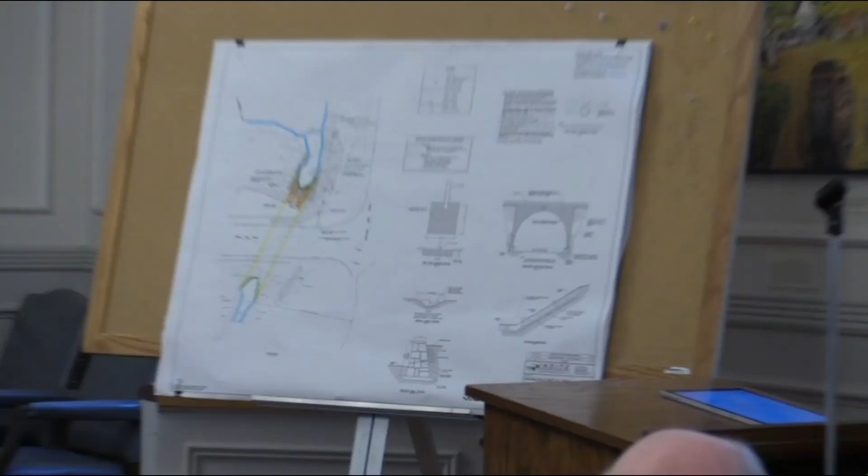Now, instead of just restoring things to the way they were so that things can erode again, we're going to put a diversion swale along the curb line that brings the water away from the inlet of the culvert and discharges it further uphill into the stream after we create a small stilling basin. This swale is going to provide some filtering of runoff as well as the stilling basin that doesn't currently exist today. Right now, the water comes straight into the stream and is eroding the soil, which is a problem. So we feel there'll be a little bit of a benefit from that.

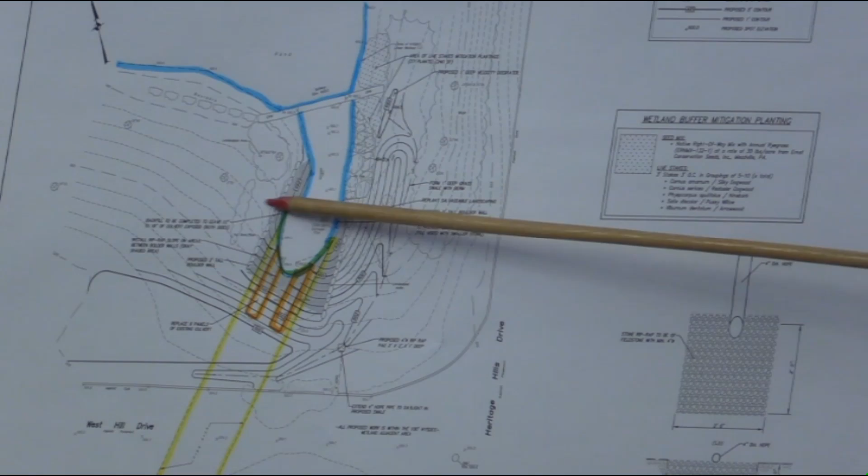In addition, we are going to better armor the side slopes with riprap to prevent further erosion. Water doesn't like to turn, it likes to flow in a straight line. Unfortunately, the angle at which the water leaves the pond is not in a straight line with the culvert. You have a dog leg. So we're going to reinforce the sides with riprap as part of this work to prevent the embankments from eroding out in the future.

We've received the latest memo from Woodard and Curran. We believe the comments that are left are very technical in nature and that we can address. We don't think they'll result in a major change or substantial changes to the plan. Our goal tonight is, if everything goes well with the public hearing, to ask you to close the public hearing, and hopefully we would then ask for the resolution to be authorized for chairman's signature so that we don't have to come back for another meeting.

Do you want to make any comments? So, we issued a memorandum for the last meeting. They addressed the vast majority of those comments. There's a couple of lingering items that we just need to close the loop on, and we added to our memorandum, as I mentioned at the meeting last time, some more detailed comments about the bypass, just to make sure that we're fully understanding. We've listed those in the memorandum. I went through them briefly with Rich.

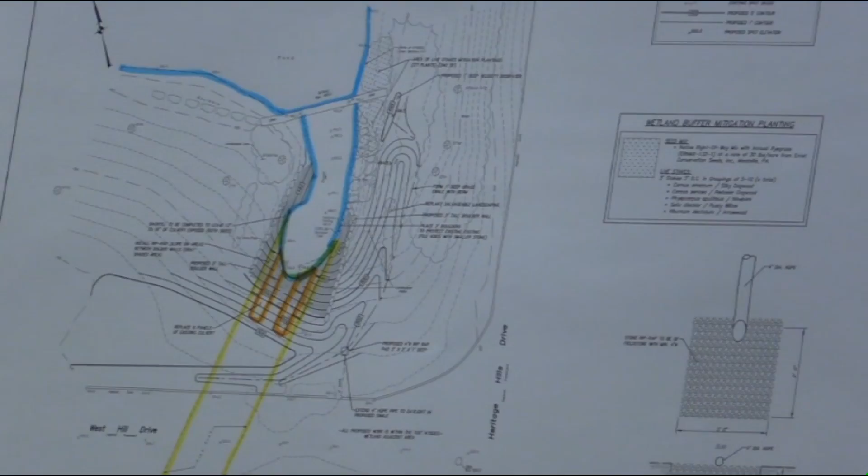Really what we want to make sure is that, because you all know how this goes, once we open this up we're going to get the storm we don't want to get, right? So I just want to make sure that we understand things like the 24-inch pipe, what kind of flows can that convey compared to what kind of storm events, or maybe there's operational procedures that we might be able to implement, like Rich was suggesting, maybe just abandoning work and letting the water flow if a storm is coming. We have to work through those kind of details.

To me, it's about making sure, number one, that we understand how much of the base flow. That 24-inch pipe's got to handle the base flow coming through that stream, plus some additional storm water, which Rich and I are going to work through. But we've put some design storm levels in the memo around the 100-year mark.

Rich is pushing back a little bit on, hey, we're only going to have this thing open for 2 weeks. Do we really need the 100-year storm? I think it's worthy of a conversation and a consideration as to what kind of storm events we might expect during that time period. We might not need to go all the way to the 100-year storm is my point. I just want to make sure that the 24-inch pipe is enough to carry the base flow, plus a storm event that we think is appropriate. And we're going to take a look at a couple different analyses around that.

The other thing that I want to make sure of is, right now that pipe kind of floats. I want to make sure we anchor that pipe just in case we do get water flow, so that it doesn't wash away, right? So I want to anchor that pipe to make sure that it is stable and staying there. I also have some comments on the details of the cofferdam, about how to tie in and make sure we don't get any erosion underneath it, make sure we key in some of the plastic that's there. But these are all technical comments. I think conceptually the system as proposed is going to work. I just think we've got to work out some details.

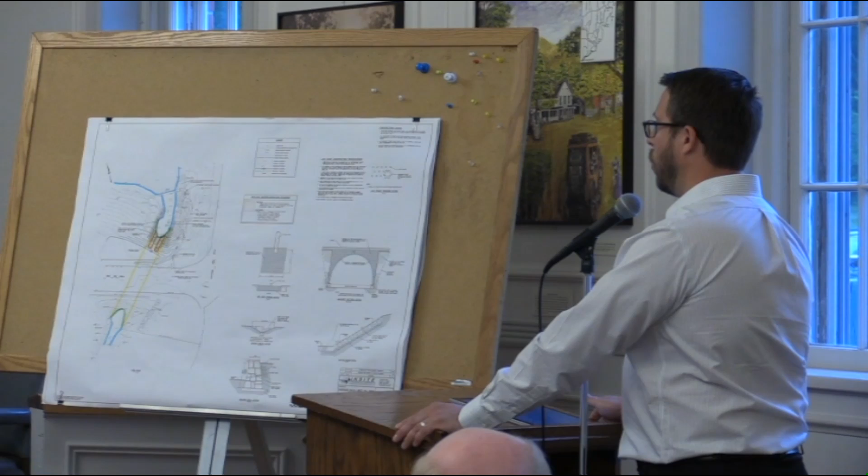Just on the temporary condition, yes, we're absolutely going to look at the sizing calculations with Joe, and we want to make sure we're at a safe point as well. One of the luxuries of this project is we're not actually disturbing the stream bed. And the luxury in that is if a storm event is coming, we can pull the cofferdam back out of the work zone, let the storm come through, and it's not going to impact us. Oh, that's neat. So that was one of the reasons why we were talking to Joe about what's really the right storm to look at.

Right. We'll come to a good place. That would be okay as long as we don't have the side slopes open or other areas that would prevent us from doing that. So we might have to come up with a process or a procedure, a decision-making tool in the field or something like that, but we obviously want to streamline this process for Heritage Hills so that we can get this thing constructed.

Yeah, my questions basically are just, I just think it's fascinating. I didn't mean it as a challenge. Oh, yeah. Whenever you ask a question, I get on my toes, I know that.

Well, they're working on a side slope, so I do not believe so, but Richard can answer that question. It was kind of a loaded question in that in the center of the road we're 15 feet. At the edge of the road we're 15 feet, but then the slope comes down. Where we're working, it's only a couple of feet. Okay. So there won't be shoring. You don't need to shore it then? Right. All right, well, that's a clearer picture now.

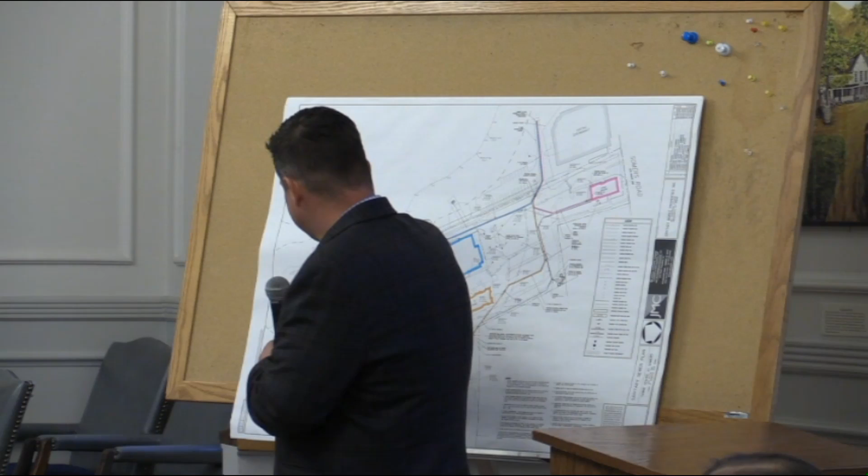There's no buildings proposed here? No, there's not. But we should look at, I mean, if there's a line of sight, that one tree can help, we should be looking at it. I understand, especially to sell those units. There is some slope there that's gonna work. Also there's some screening that's provided around the cell tower that's gonna block us from this direction.

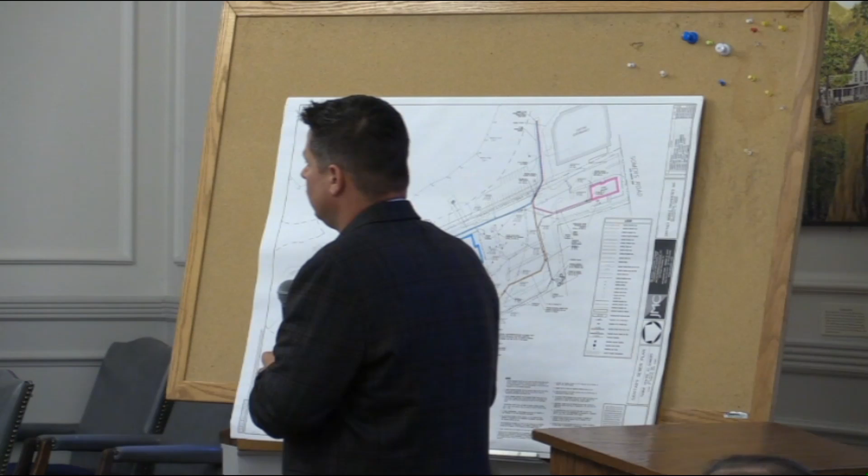And did we find out how often the automatic running is? Once a week. I did not. That was a question at our last meeting. What was your question, Nancy? The automatic running, exercising. Where I live, it's once a week for 7 minutes. And that's pretty much a generator standard.

Well, someone said monthly, that's why I raised the question. I never heard of it running monthly. It's recommended every 7 days, it runs for about 10 minutes. There's different types of cycles you can program it to do. I've been timing them, 7 minutes. I'm not gonna forget that now. Everything will be on concrete pads? Yeah, the generators will be on a concrete pad as well as the propane tanks.

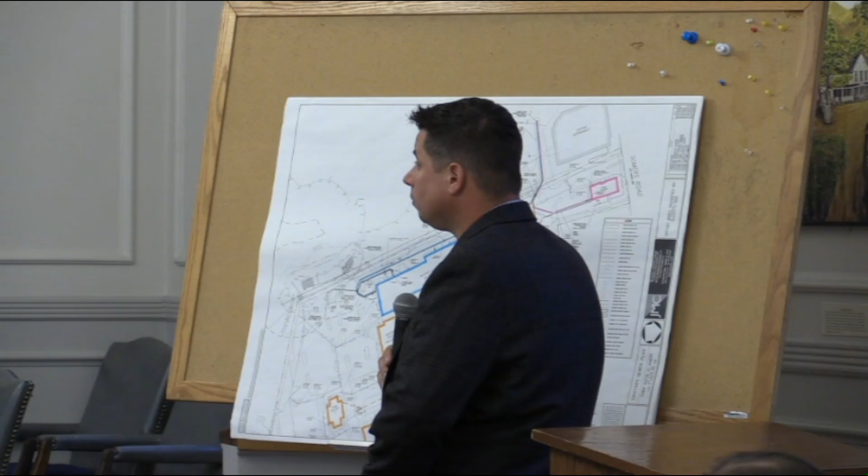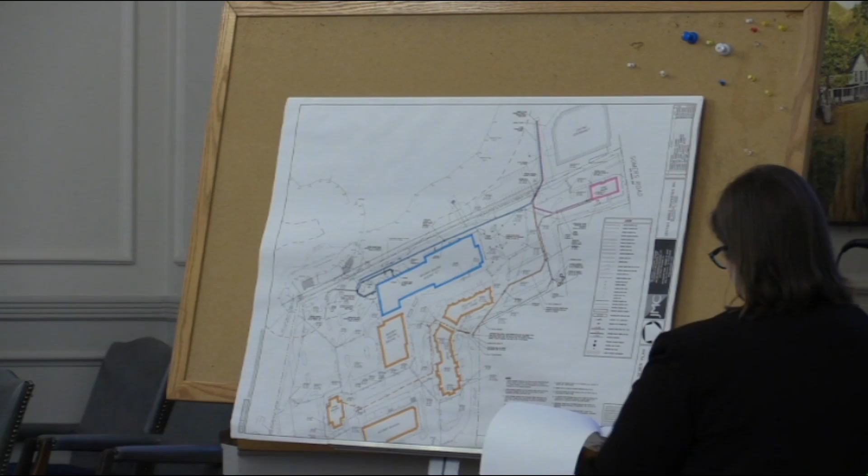Any other board member comments or questions? Not on that, but I have a question on one of the whereases. Page 2. Which one? Normally when we list correspondence, we list it by date. And the second whereas doesn't list the dates. Where are we, Nancy? On page 2. Second whereas, it says the town received a copy of a letter from Westchester County Planning Board and the New York City DEP.

Well, I found my letter from the New York City DEP, and that letter is dated March 5th. I don't have a copy of the Westchester County Planning Board letter. Would you like me to put the dates in? Yeah, I think that normally happens. We will add the dates. But I'd also like to make another comment. The letter you gave us from New York State Department of Environmental Conservation, on its letterhead, to Mark Broussard, is dated May 17th, with the obvious contents we've already discussed.

I just happened to put my hands on a letter on the same letterhead dated March 19th, acknowledging that the town board is the lead agency. Nowhere in there do they mention the consent order. Isn't that interesting? Those are different departments. They're right down the hall from each other, but they're different departments. I think that explains why it took 2 years for us to find out there were problems. One hand doesn't talk to the other.

Hi, my name is Kevin Descharnay, and I'm the owner's agent and the applicant agent for this project. My engineer could not be here tonight, but I'm very familiar with the project, so if there's any questions on the engineering side, hopefully I can answer them. So basically, I'll just walk you through the project.

So basically, we came here 2 months ago and you voted to be lead agency for this project. We're seeking approval for the site plan. There is an existing parking lot that we would like to enlarge. Also, there is a building bump out that we need to get permission for, and also a side terrace, and one small additional parking spot down here.

One of the things that came up was we had the wetland restaked, and the buffer is actually here. The previous maps showed it back here. So taking that into account, we reduced the parking lot size to the extent that we could, and we're actually willing to give back this area here that's currently paved. So basically, that's the overview of the site plan.

And we've been working with Joe's office, we've had 2 meetings down there to go through treatment of the stormwater for this entire parking lot, not just the new area that we are creating. And we would put that treatment outside the buffer in this area here. We have submitted all the drawings both to Joe's office and the town, where we are proposing to put that, and we're on our second round of responses on comments and questions from the engineer. And I think the last round should be answered this following week.